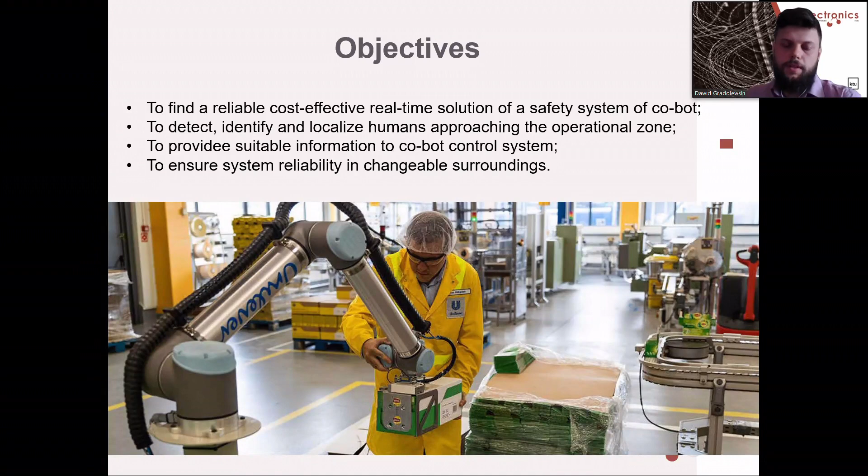Robotization is an efficient and cost-effective approach in modern factories. More and more robots and manipulators are placed in the workplace shared with humans. Such close cooperation between humans and robots may lead to hazard situations, even to human death. The main objective of the thesis was to find a reliable, cost-effective and real-time solution of a safety system of the Cobot to detect, identify, and even localize humans approaching the operational zone of the robot. The system reliability in the changeable surrounding environment without compromising machine productivity is crucial for this research.

In this research, we use user-driven design methodology to define all functionalities and constraints of the system. The design process was systemized, and at each stage, both the stakeholders and the future users were involved. The designed product is mostly dedicated for medium and small sized companies, where price and ease of adjusting the manipulators to other tasks is crucial.

The defined general and itemized functionalities are summarized in this table. We selected 7 crucial functionalities: safety system, object detection, detection classification, object localization, threat classification, Cobot motion control, and interfacing. For all the functionalities, we itemized and gave particular constraints for each of them. For each, we tried to define all the possible technologies and algorithms which can fulfill the requirements, and during the analysis we found the most suitable one.

After the analysis, we came up with a solution, which is an IoT-based distributed computing safety system. The safety system is designed around the IoT concept, where users have easy access to each subsystem through the GUI. All data is stored regarding the previous detections and the system performance in the database. The safety system is composed of sensing detection modules, a decision-making system, and the robot, all of which are connected via the internet. The data processing is decentralized, so the computational overload is reasonable.

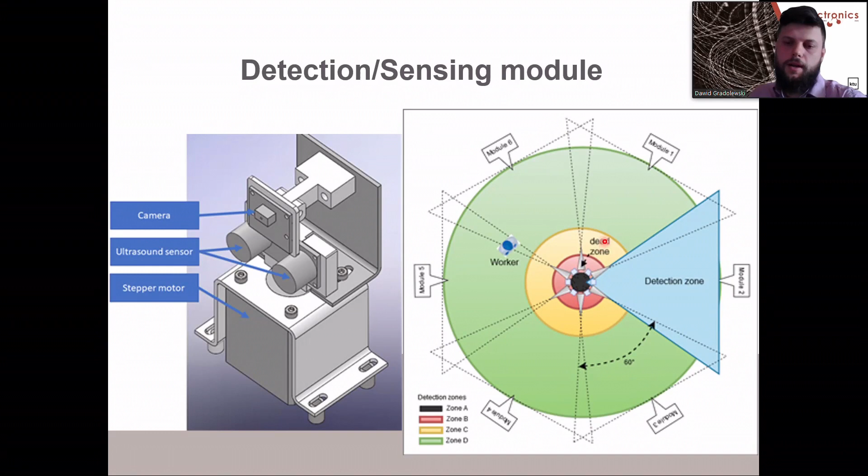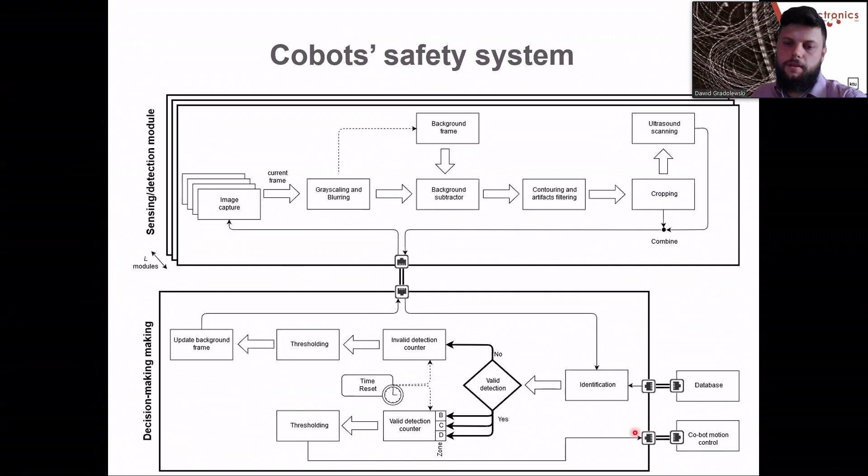The sensing detection module algorithm is based on motion detection. First, the background and current frames are converted into grayscale. Then, to minimize false detection of small patterns in the image, blurring is performed.

On the later stage, the absolute difference between the corresponding pixels is calculated. Next, the differential image is calculated and thresholded to reduce artifacts caused by lights. Then the cropped image is sent to the identification process.

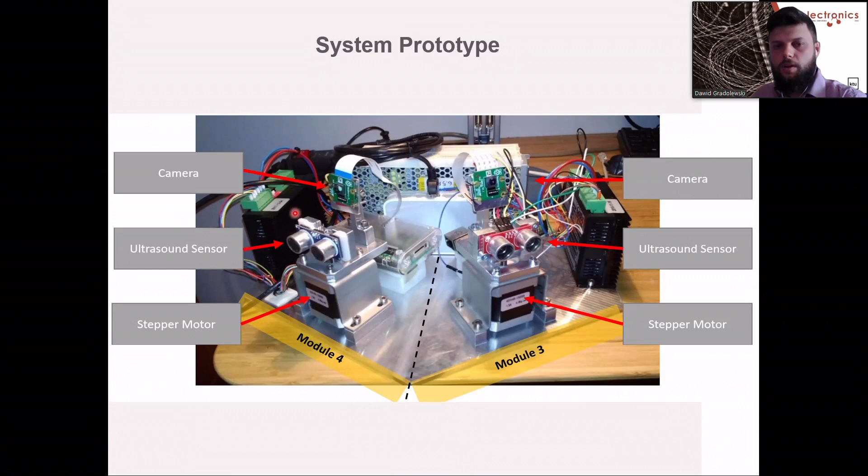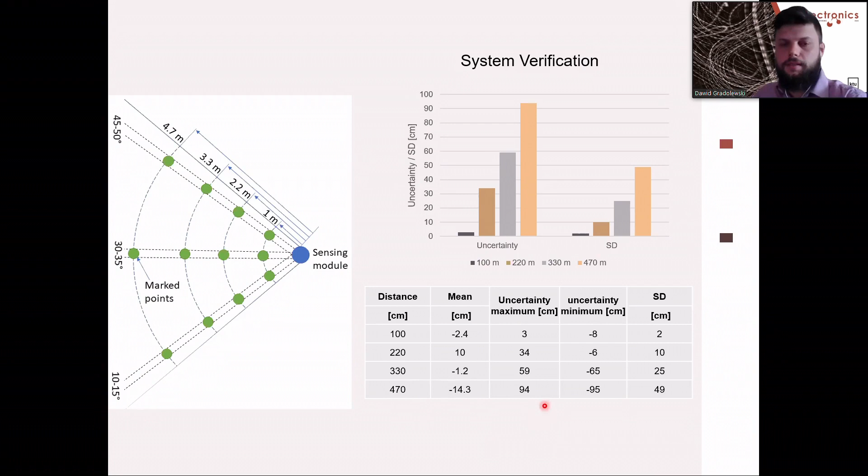This research shows the capacity of developing the most reliable real-time safety system for the Cobot, which is able to detect and localize human multi-objects approaching the Cobot's operational zone, and then provide a decision about a suitable action for the Cobot's control.

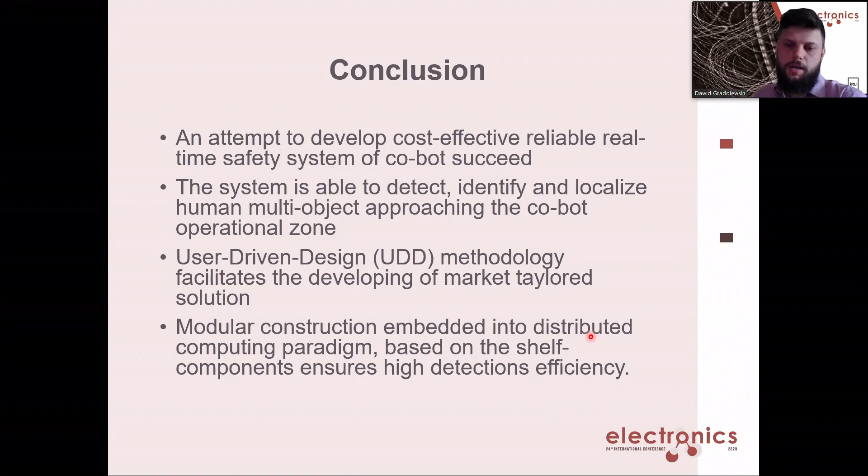The systematic design approach of the user-driven design methodology facilitates the development of the system, which meets all requirements and constraints defined by future users and stakeholders. The modular construction, embedded into a distributed computing paradigm basing on shelf-components, ensures high detection efficiency and low costs of the system. Thank you for your attention.

Okay, thank you, David, for a nice presentation. This is a little bit complicated now, maybe with the questions, but I think all the presenters may have a question. If you have a question, just open your microphone and state your question.

And the audience watching us on YouTube, please type your question. There is a chat bar at the top where you can type your questions. I see that we have some small delay between the presentation on Zoom and on YouTube, but I think David can also answer, and I can read the question to him.

So David, waiting for the others, I have to take my opportunity to ask you the question. You showed the lighter side of your project, everything that was successful. What was the drawback of your project? What is the drawback of your solution, if you may find it? Maybe not the drawback, but maybe the future work.

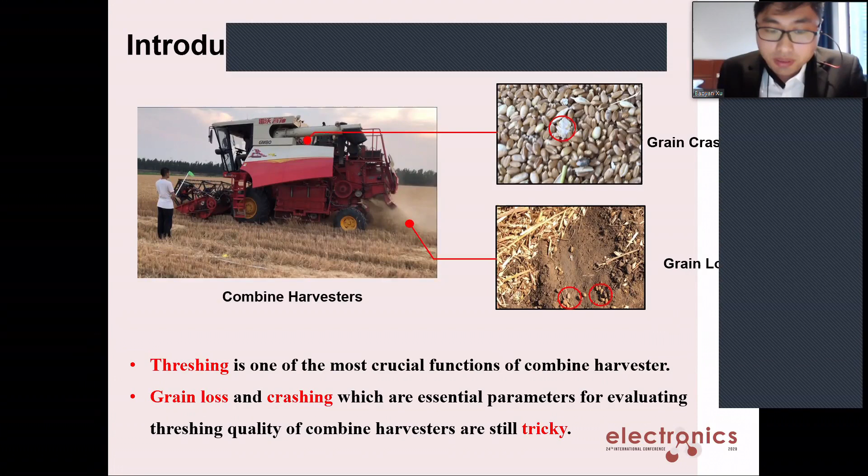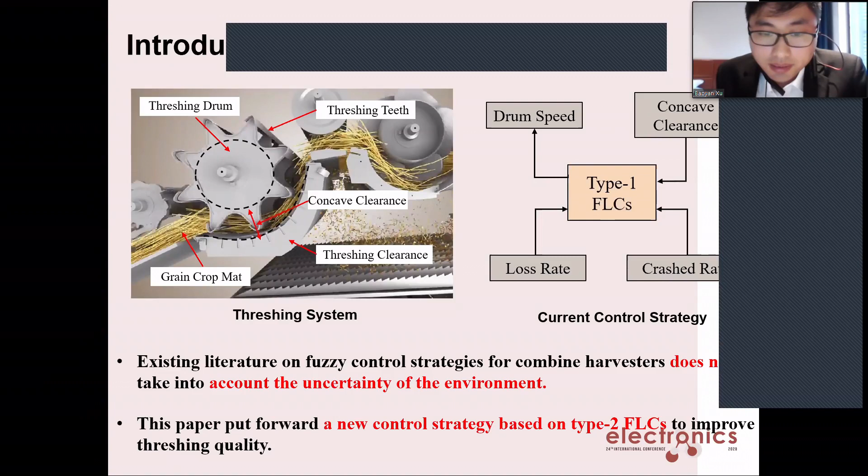But it should be pointed out that existing literature on fuzzy control strategies does not take into account the uncertainty of environment. Consequently, it is not reasonable to use an accurate membership function for measurement data without considering fluctuations and disturbances. Therefore, we proposed a new control strategy based on type 2 fuzzy logic controllers to improve threshing quality.

The control strategy based on the fuzzy idea must obtain the relationship between parameters. Therefore, in order to obtain the relationship between concave clearance, drum speed, loss rate, and crashing rate, a basic data acquisition test is designed.

The detection part of the threshing separation quality system installed on the combine harvester mainly consists of 6 parts: crashing rate node, drum speed node, grain loss rate, grain loss node, concave clearance node, data acquisition terminal, and computer.

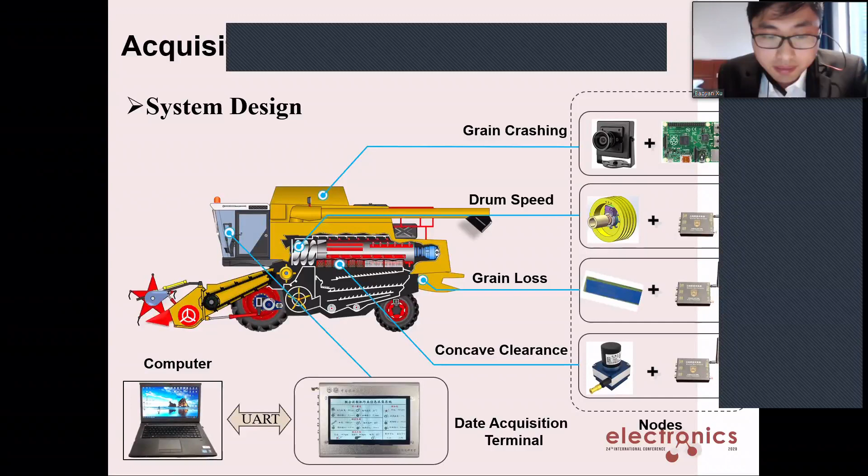The field harvesting experiments were conducted at Beijing Xiaotangshan. According to the national standard equipment for harvesting combine harvesters test procedure, the concave clearance was adjusted to 10 millimeters, 15 millimeters, and 20 millimeters, and the test results are shown in the picture.

And 2 rules can be obtained from the result. The first one: when the concave clearance is 10 millimeters, 15 millimeters, and 20 millimeters respectively, the grain crashing rate first increases and then decreases. The other one: when the concave clearance is 10 millimeters and 15 millimeters, the grain loss rate decreases with the increase of drum speed.

But when the concave clearance is 20 millimeters, the grain loss rate decreases first and then increases.

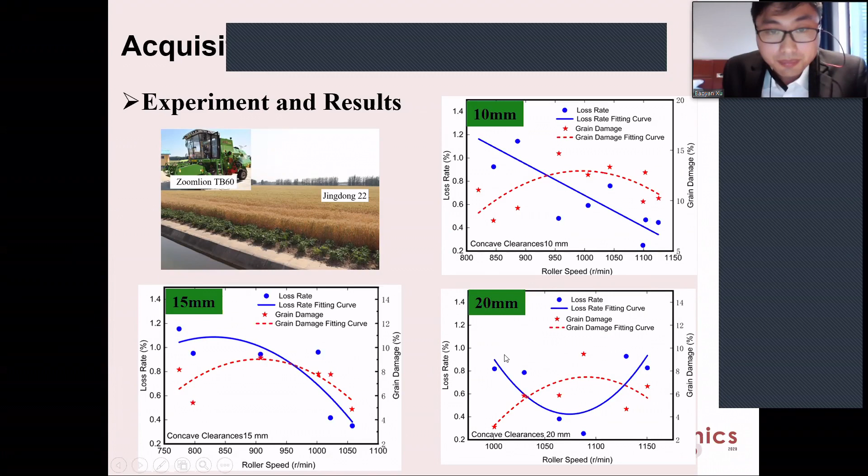In order to improve threshing quality, two control strategies were designed based on experimental data. One is low grain loss rate, and the other is low grain crashing rate.

In the low grain loss rate control strategy, input variables are loss rate and concave clearance, and the output variable is drum speed. In the low grain damage rate control strategy, input variables are grain crashing rate and concave clearance, and the output variable is drum speed.

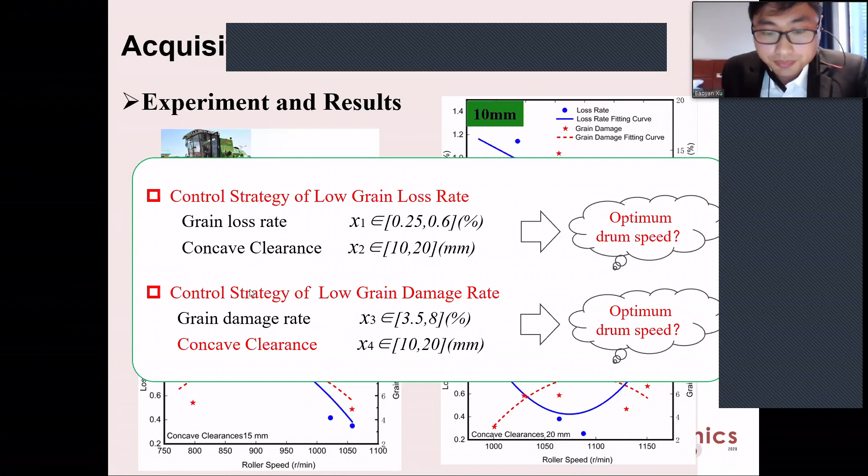Before designing the control strategy, let me briefly introduce the type 2 fuzzy logic controller. In the Cartesian coordinate system, the type 2 fuzzy sets can be expressed as a two-dimension region, which is called the footprint of uncertainty.

It's the union of all primary memberships. The upper membership functions and the lower membership functions are the boundary of the footprint of uncertainty, and can be expressed as type 1 fuzzy sets.

In the low grain crashing control strategy, one input set is damage rate. Damage rate is defined by three membership functions: ND, MD, and LD. Another input set is concave clearance.

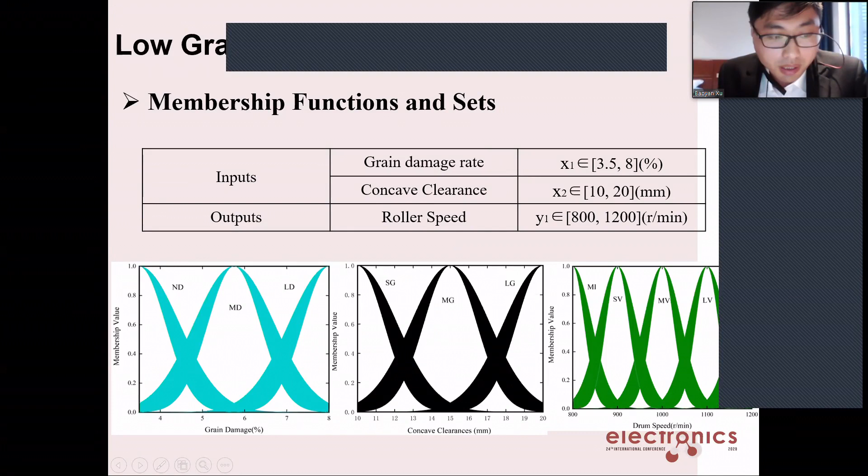Clearance is defined by three type 2 fuzzy Gaussian membership functions: SG, MG, LG, in the interval 10 to 20. The output set, linear velocity of the threshing roller, consists of 5 membership functions: MI, SV, MV, LV, MA, in the interval 800 to 1200. Characteristics of the inputs and output of the grain damage type 2 fuzzy logic controller are recorded in detail in the table.

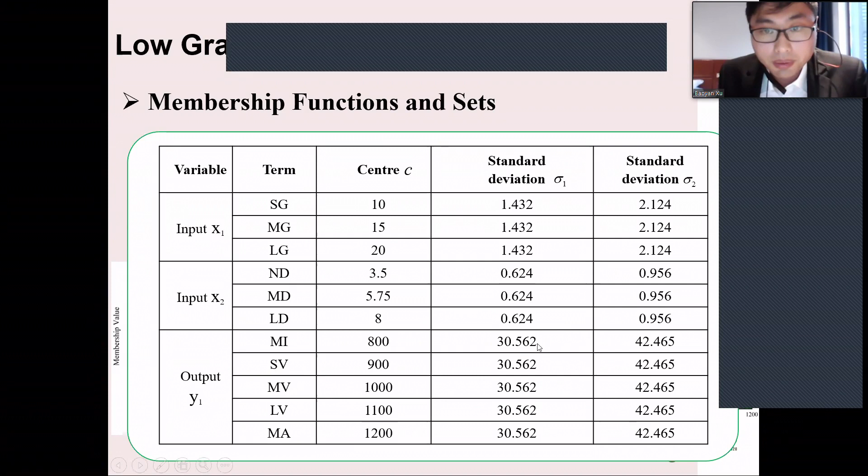According to experiment data, 9 rules of the grain crashing fuzzy logic controller are established.

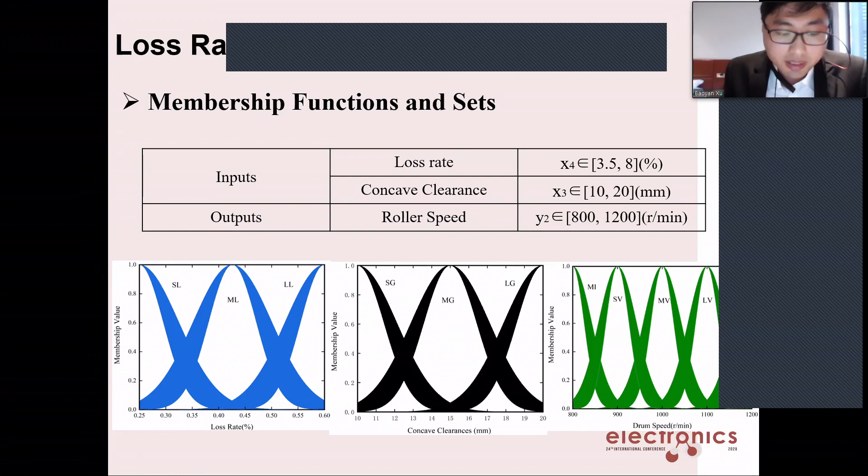Similar to the grain crashing control strategy, in the loss rate fuzzy logic controller, the loss rate set is defined by 3 membership functions: SL, ML, and LL, in the interval 0.25 to 0.6. The concave clearance and roller speed sets are equal to the grain damage control strategy respectively. Similarly, 9 rules are designed according to the experiment data.

In order to test the controller, grain damage and loss rate type 1 fuzzy logic controllers are designed and compared with type 2 fuzzy logic controllers using the fuzzy toolbox from MATLAB. Moreover, to evaluate the response of the strategy, integral of square error and integral of absolute error are used in this section.

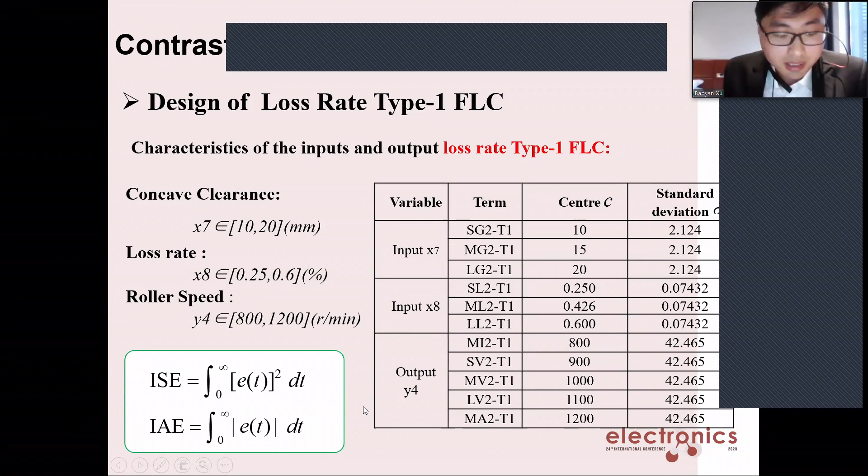Type 1 fuzzy logic controllers and type 2 fuzzy logic controllers of grain damage are built in the fuzzy inference editor in MATLAB. When the value of concave clearance are 10 millimeters, 15 millimeters, and 20 millimeters respectively, there is always an error between the outputs of the fuzzy logic controllers and the fitting curve, on account of the open loop system. However, their trends are consistent, as can be seen.

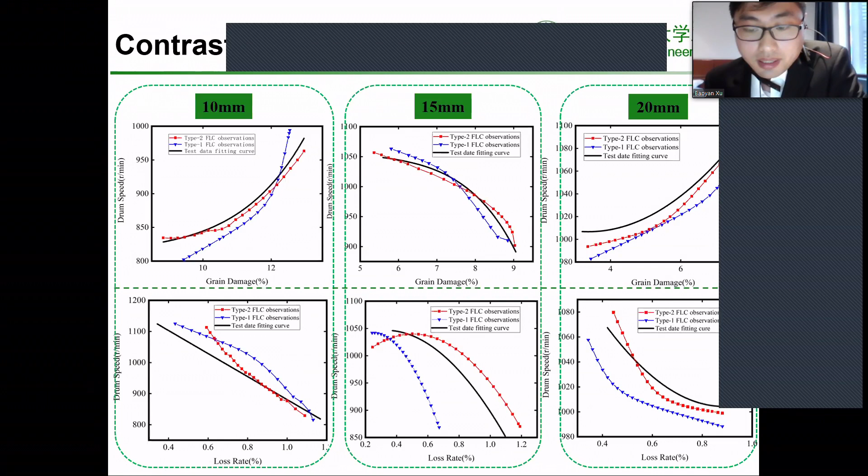Integral of square error and integral of absolute error of the type 2 fuzzy logic controller are less than type 1's. Those values indicate that the type 2 fuzzy logic controller performs better than type 1.

In order to verify the effectiveness of the control strategy, controlled and uncontrolled experiments are designed. In field experiments, the loading speed of the roller is calculated based on the control, and the roller speed is set as the calculated value.

From the experiment results, it can be seen that the damage rate and loss rate of the control experiment are reduced to a certain extent. When the concave clearance is 10 millimeters and the speed of the roller is 900 RPM, the loss rate and damage rate decrease the most, with amplitudes of 44.6% and 25.26% respectively.

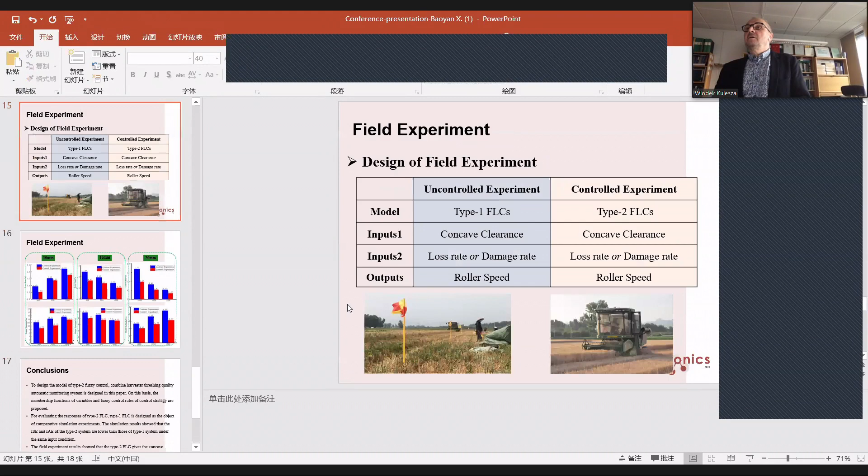Do you see we have some problem, you cover your picture with some gray box? I don't know what this is, you see? We had this problem all the time. There are still some gray squares on the top and on the right hand side of your screen. I don't know where it is from, but it is some problem. Maybe fuzzy logic is needed to get rid of this. Do you see this on your screen?

My English expression is not very good. No problem, no problem. Continue, okay, yes. So what is your motivation, please?

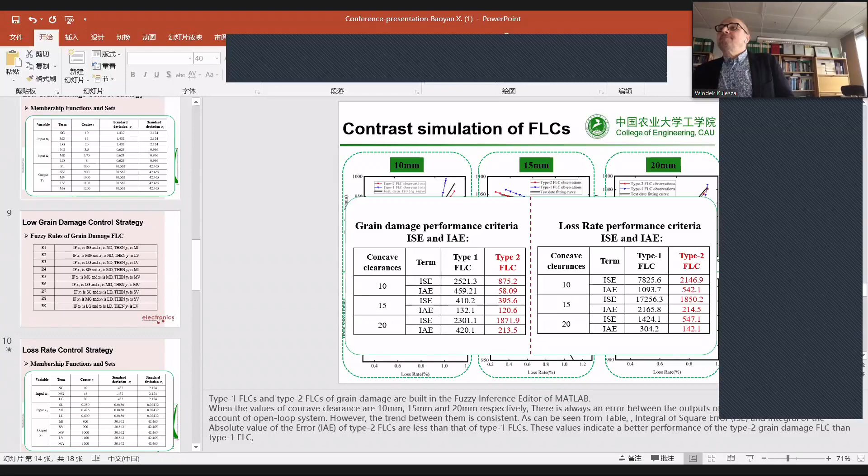Because agricultural control is not precision control, so I chose the fuzzy logic control.

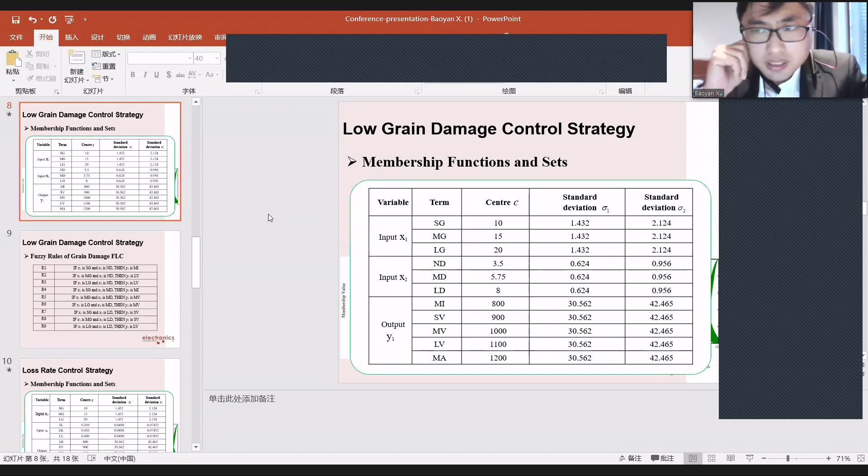Okay, when you come to your conclusions, please, on the last, next to the last slide, you said that you grain damage rates and maximum decrease in losses. What do you compare it with? Do you compare it with this type one, or what is the reference to this gain that you got? To a regular controller, or to which kind of controller did you apply this reduction and decrease and so on? We need to know what is the reference point of your result.

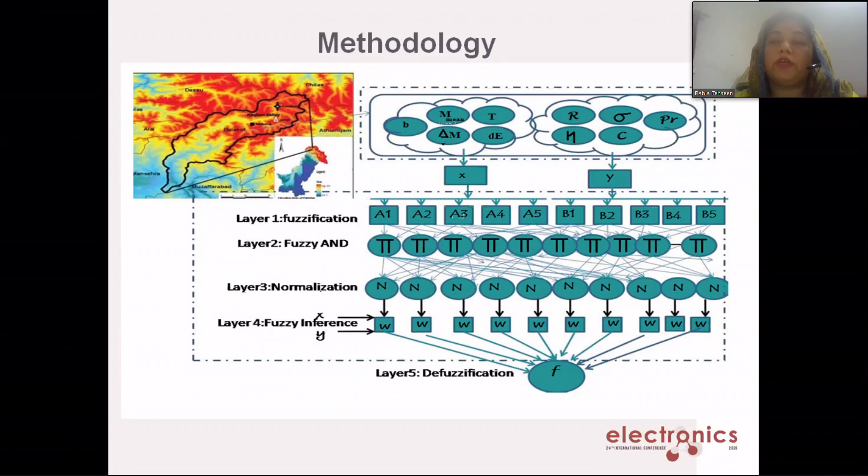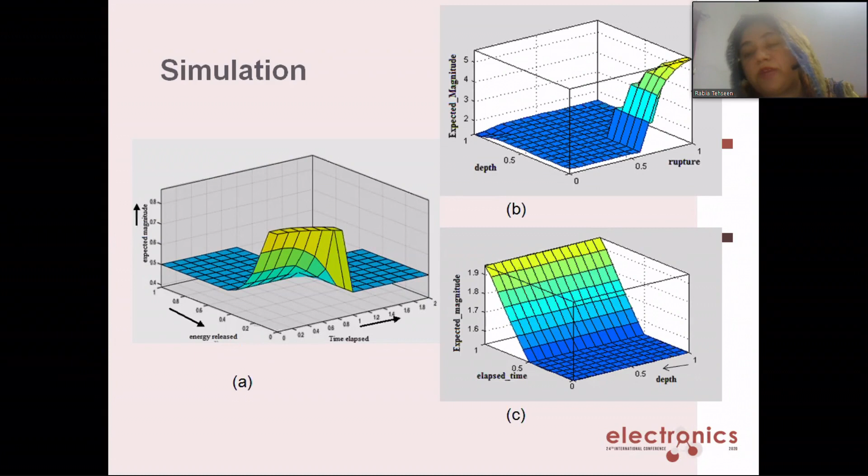We have implemented and simulated it in MATLAB. These are the results of our method.

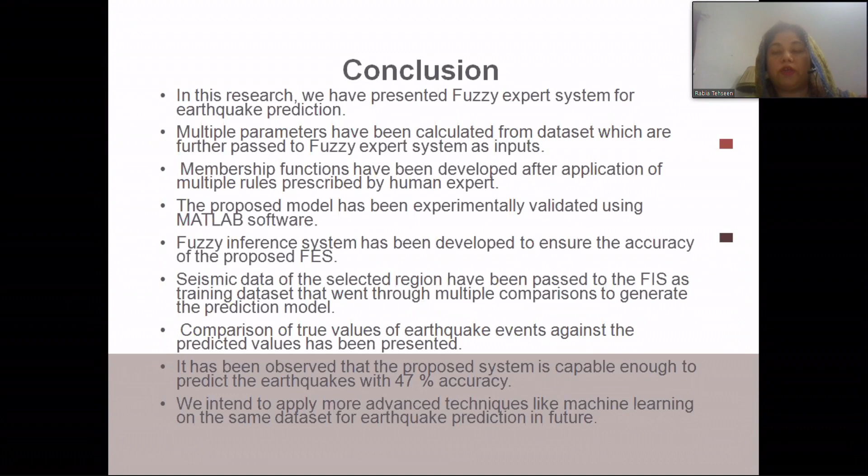Conclusion. In this research, we have presented a fuzzy expert system for earthquake prediction. We extracted multiple parameters from the data set that have been passed to the fuzzy expert system as input. Multiple rules and membership functions described by human experts have been applied. We validated the data using MATLAB and generated the model. The model has given us 47% accuracy. In future, we intend to apply machine learning on the same data set to improve our accuracy, so that we may gain 60% or 70% accuracy.

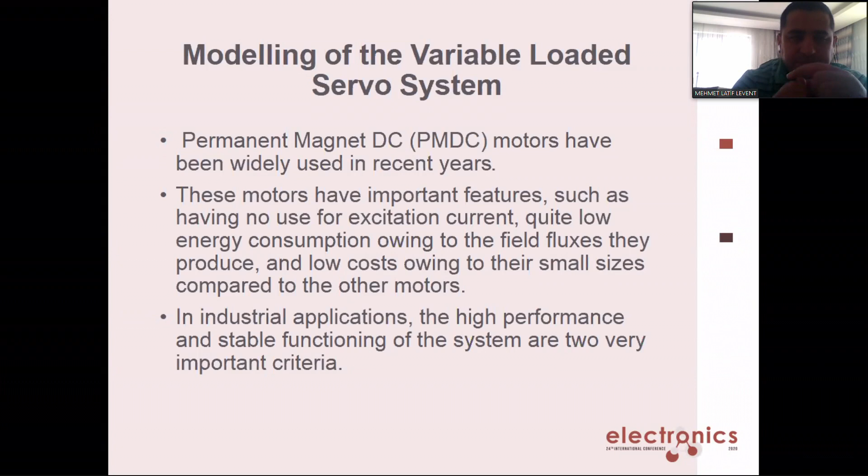Now I am going to show state estimation. Accurately estimating all the unmeasurable states of the system is an important factor that influences the functioning of the plant in high performance and stability.

There are two important methods in state estimation, called observer and Kalman filter. In this study, we used reduced order observer. The full order observer method is applied to estimate all the states in the controller designs, and the reduced order observer method is applied to estimate unmeasurable states.

This control structure is used in particular induction motor control, sensorless electric drives, permanent magnet synchronous motors, linear time delay systems, aircraft motion control, and multi-agent systems. Reduced order observer structures are commonly used for system design that provide ease of operation by reducing the degree of the observer.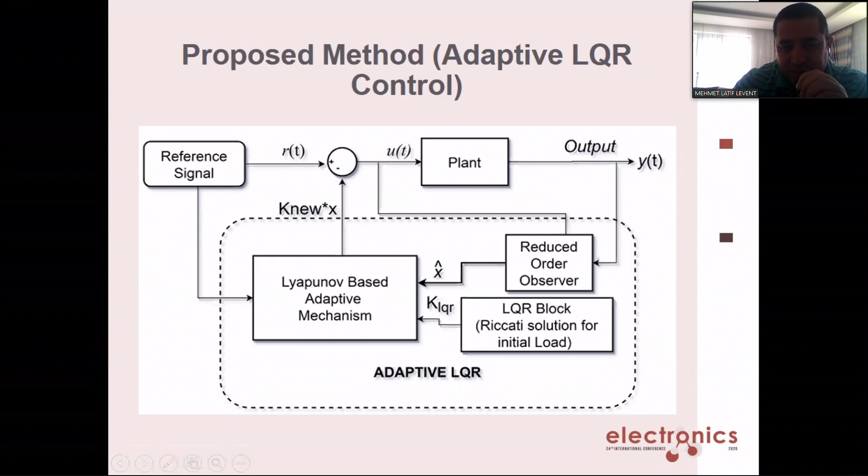We can see the Lyapunov-based adaptive mechanism as a new approach. This figure shows the block diagram of the Lyapunov-based adaptation mechanism as seen in the previous section.

Lyapunov-based adaptive mechanism, and the reference signal states that are estimated by the reduced order observer: x1, x2, x3 reference signal, and linear quadratic regulator output. We can see A1, A2, A3.

These parameters are defined as inputs in this related block. In this system, different adaptation blocks for the states—position, speed, and current x1, x2, x3—are designed. The first block provides position control; we can see the first adaptive Lyapunov stability criterion is for position control. The second block provides speed control, and the third block provides adaptation for the current control.

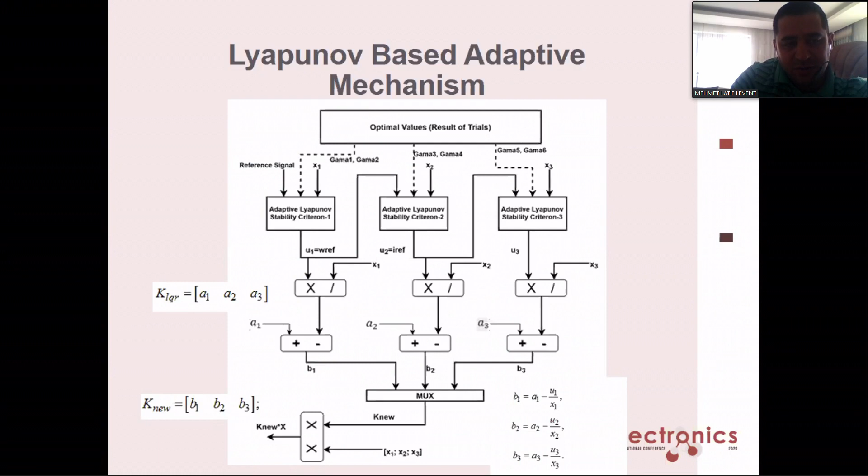In the last part, I would like to give simulation results and conclusion. When adaptive linear quadratic regulator and reduced order observer with linear quadratic regulator control methods are applied in the system, the results for the unvarying system are shown in this figure.

We can see the red line is the reference signal, the black line is the reduced order observer with linear quadratic regulator, and the blue one is the adaptive linear quadratic regulator.

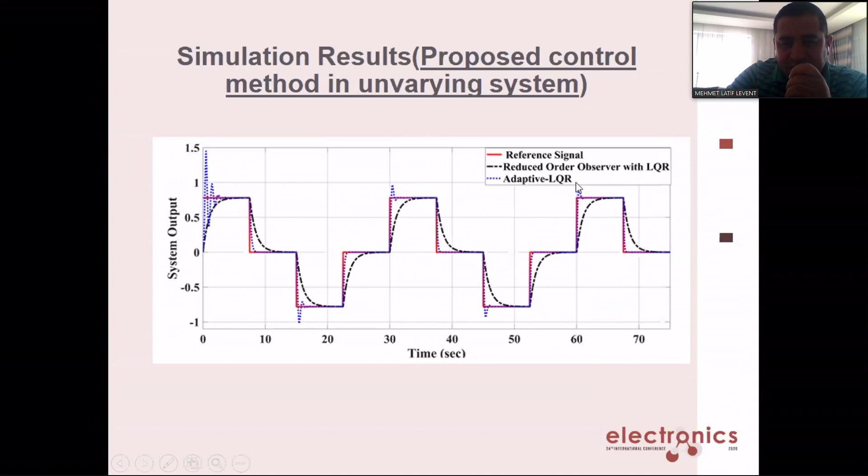Examining the error change shown in this figure, it is concluded that the position output signal rapidly catches the reference signal, as is shown in table 2. Comparing the results based on their performance measurements, it is understood that the proposed system produced better results and has high performance.

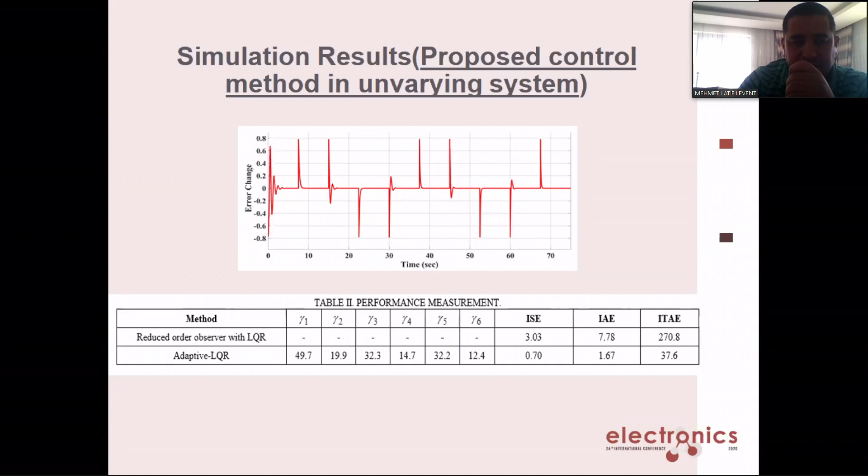The response of adaptive linear quadratic regulator and other control methods are given in this figure, and effects of the variable load that occurred after 21 seconds on the response curve of the system is shown in the second figure clearly.

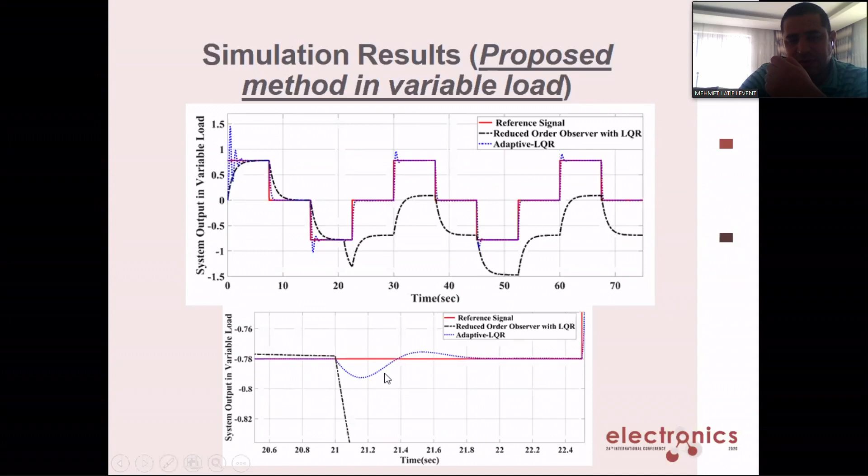We can see proposed methods catch the reference rapidly.

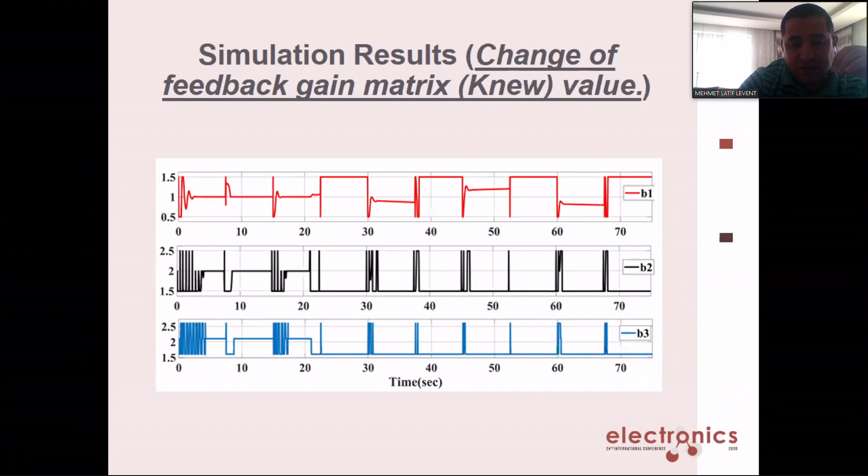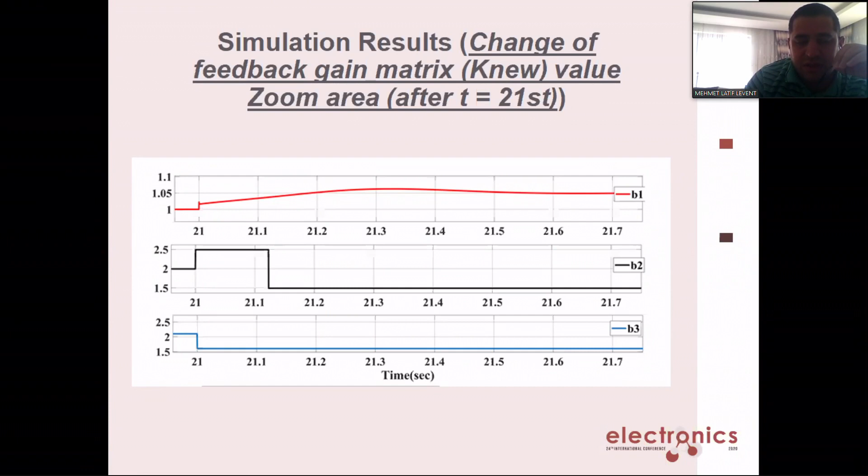Also, change of the feedback gain matrix value is given in this figure. Here it is observed that the gain matrix value changes in accordance with the environmental condition and rapidly minimizes the load effect, and we can zoom error after the 21 seconds and gain matrix value change in accordance with the environmental condition and rapidly minimize the load effect.

Conclusion: the designed new control system with a linear quadratic regulator and reduced order observer is based on adaptive state feedback control that compensates the disruptive effects such as variable load and increases the system performance.

This controller structure was successfully used in trajectory control of a servo system that can change the load over time in simulation. As is known, it is not possible to completely remove the disruptive effects. The system can estimate the states of the variable loaded servo system, thus the disruptive effects can be minimized.

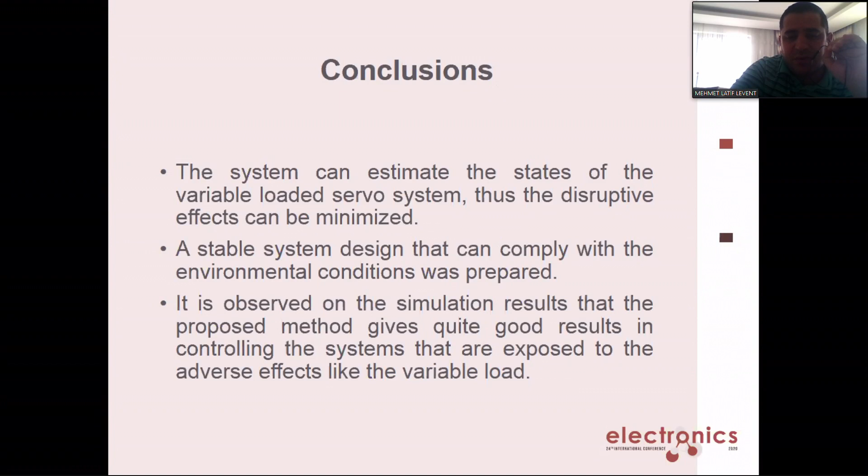A stable system design that can comply with the environmental condition was prepared. It is observed in the simulation results that the proposed control method gives quite good results in controlling the system that is exposed to adverse effects like the variable load.

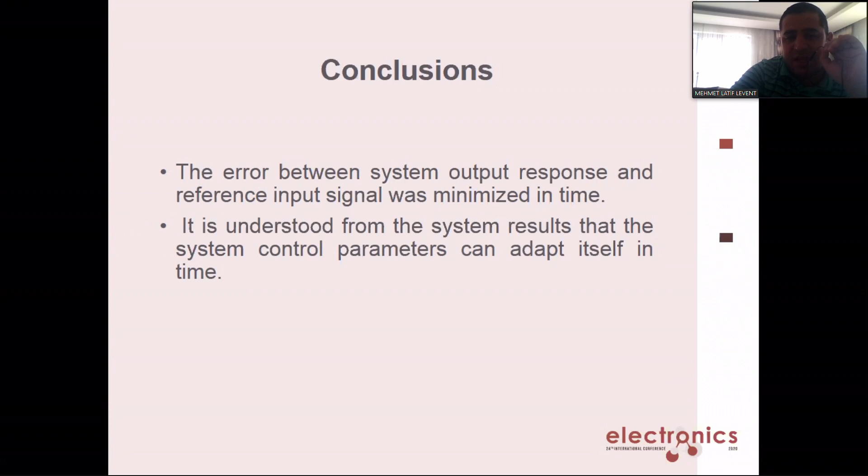The error between system output response and reference input signal was minimized in time. It is understood from the system results that the system control parameters can adapt itself in time. Thank you.

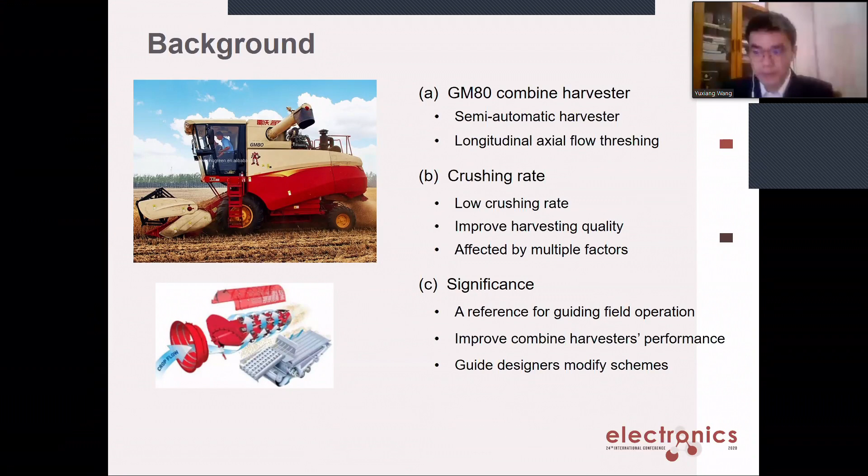In order to ensure harvesting quality and efficiency, the operator will frequently adjust speed, stubble height, and other operating parameters of the harvester based on their experience. It requires vast experience of field harvesting and high labor intensity. Meanwhile, it's difficult for combine harvesters to keep the best working performance all the time. Therefore, identifying the effective intensity of each factor and obtaining the best combination will have great meaning for actual production. For example, our research could provide a reference for guiding field operation, aiming at improving combine harvester performance while reducing labor intensity. Also, the result of our research may guide designers to modify their next generation combine harvesters.

Our objective in this paper is to identify the complex factors affecting crushing rate. A mathematical model of the crushing rate was established through four-factor, three-level field experiments in this paper. The optimal operation parameters of combine harvesters were identified through range and variance analysis.

Next, I will analyze various factors affecting the crushing rate in detail. First, let's look at the feed rate. The feed rate reflects the performance of the harvester. In general, a larger feed rate means stronger handling capacity and higher working efficiency. Multiple factors, such as the density of grain and the cutting range, will affect feed rates.

In our experiment, we made some assumptions in order to control some variables. The density of grain had small changes within the same group of experiments because the crops grew uniformly. In our experiment, the cutting range didn't change because we always did full harvest. At the same time, during harvesting, cutter height was maintained at a defined height, so the stubble height was almost the same. The only adjustable variable is operation speed, which can be easily controlled by drivers. In our experiment, we set 3 levels for operation speed: 4, 6, and 8 kilometers per hour.

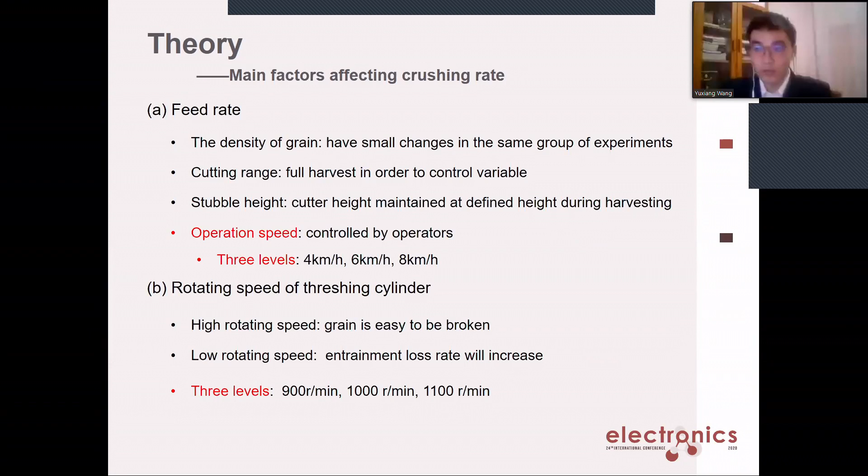The third affecting factor is the moisture content of the grain. If the moisture content is high, low hardness and poor impact resistance will lead to high crushing rate. But if the grain is too dry, poor toughness, low strength and poor impact resistance will bring more broken grain.

In this paper, experiments were carried out in the morning, noon, and early evening. The 3 levels of grain moisture content were 15.1%, 13.26%, and 14.4%. The last affecting factor we studied is concave clearance.

According to relevant research, when the gap between concave plates increases, it is beneficial to the flow of crops and penetration of grains through the crop layer. Thus, crushing rate and entrainment loss will decrease. According to operators' experience, 3 levels of concave plate gaps were selected to match the threshing cylinder speed: 10, 15, and 20 millimeters.

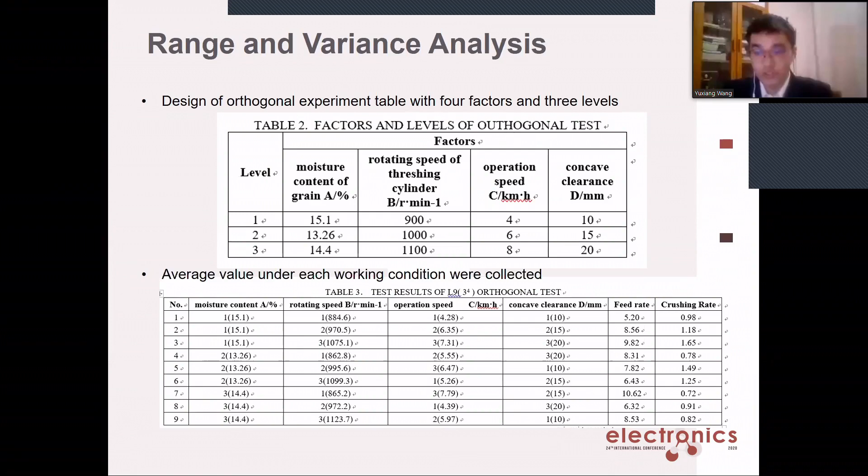In order to determine the influence degree of each factor on the crushing rate, we did range analysis. As Table 4 shows, the value of R was calculated. The larger the value is, the greater the influence of this factor on the crushing rate. So we could see the moisture content of grain and the rotating speed of threshing cylinder have almost the same significant impact on the crushing rate. Then followed by operation speed, which reflects feed rate. And the concave clearance has less impact on the crushing rate.

At the same time, variance analysis also confirms this result. According to the result of range analysis, we could determine the optimal scheme. For factor A, we choose level 3, which has the smallest value of Ki. So the optimal scheme determined with the same method is A3, B1, C2, D2.

In other words, the moisture content of grain is 14.4%, and the rotating speed of threshing cylinder is 900 revolutions per minute. Operation speed is 6 kilometers per hour, and the concave clearance is 15 millimeters. The performance of combine harvesters will be better when GM80 runs in this condition.

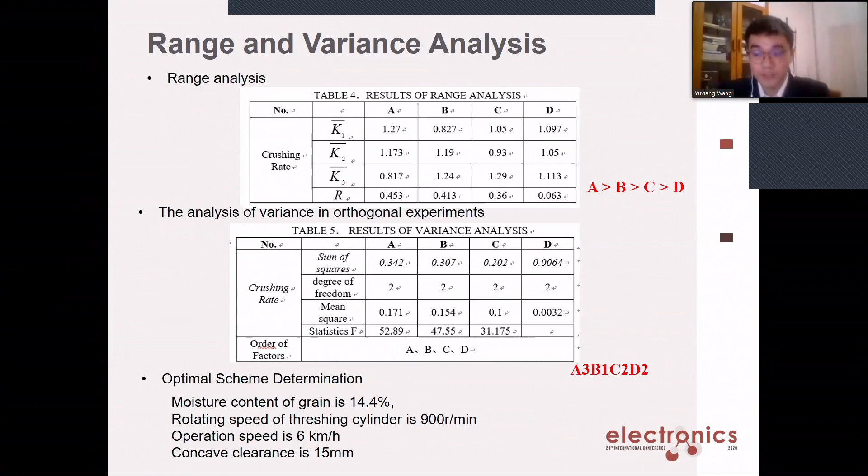In order to quantitatively analyze the relationship between those parameters and the crushing rate, the multiple regression method is used to establish the crushing rate model. Since the grain moisture content has a great influence on the crushing rate, the crushing rate and the threshing cylinder rotating speed are fitted separately under the same moisture content. After removing the abnormal data, the fitting results are as shown in this figure. Table 6 shows the regression equation of threshing cylinder rotating speed and the crushing rate.

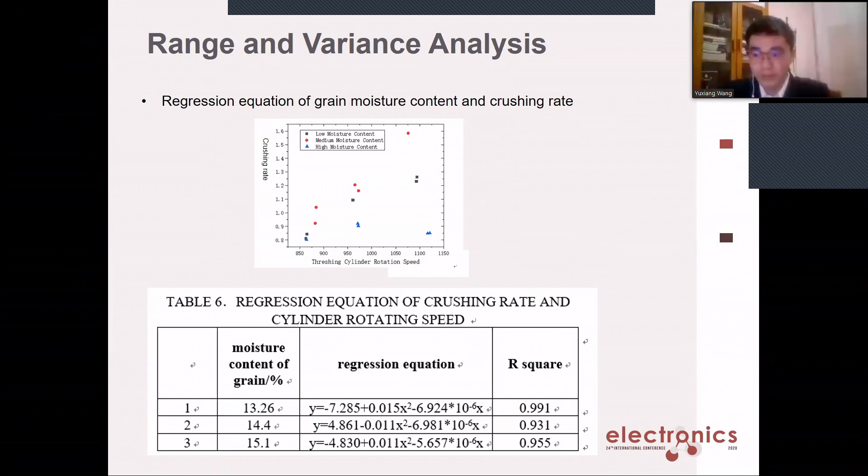The last part is the conclusion and the expectation. Through this experiment, we can determine the optimal control parameters for the GM80 combine harvester, and we think that orthogonal experiments with more levels could be designed to explore more exact mathematical models. Meanwhile, every year we will continuously collect data to establish a prediction model to estimate yield. Also, through our research, we believe that we will promote the development of combine harvesters in China.

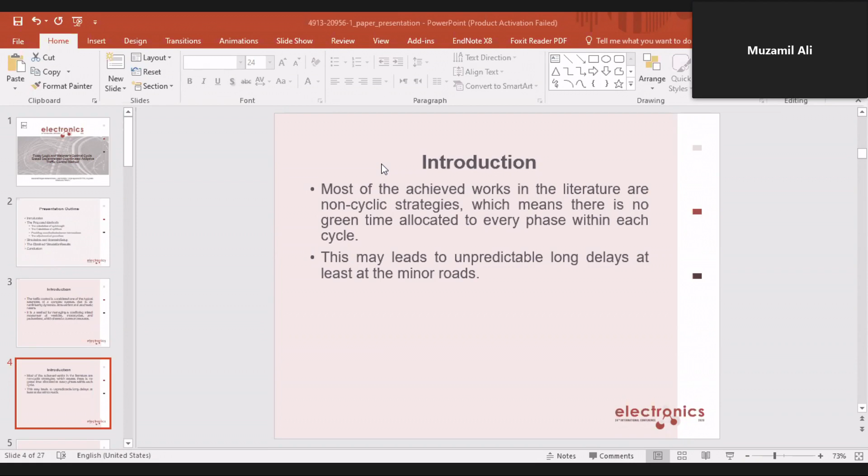Can you hear me now? Yeah, I hear you, but I don't see your face. So please open your camera as well. I'm trying to open my camera, but I don't have permission. No, you may have it, allow it. You cannot stop the video because... Okay, oh now okay, we see you. We have seen you before because you appeared for a while on the screen and so on. So you know, we are a little bit short in time, so I hope that you will manage it in the required time. Okay, good luck, I hope that.

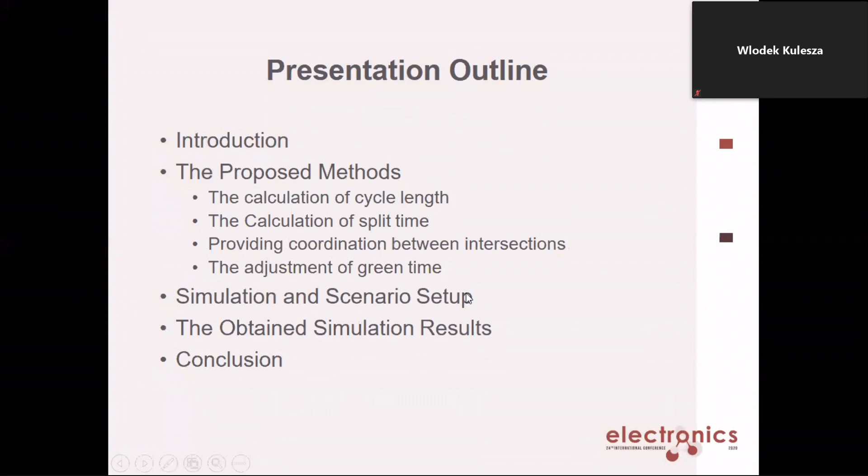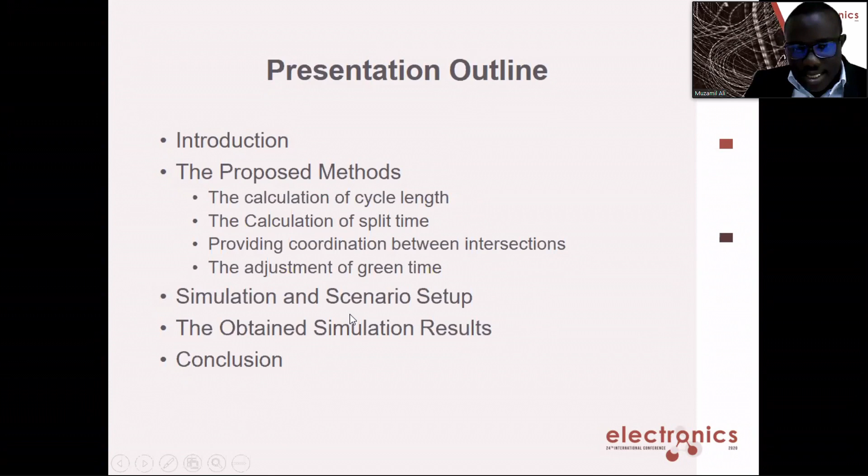I will first introduce the traffic control system and its importance, and then move to the proposed methods, including how we calculate the cycle time split, provide coordination between intersections, and adjust the green time. Then we discuss the simulation and scenario setup, and conclude with the obtained results and conclusion.

Traffic control is considered one of the typical complex systems due to its non-linearity, stochastic nature, time variance, and so on. It is a method for managing conflicting mixed movement of vehicles and motorcycles that use shared infrastructure.

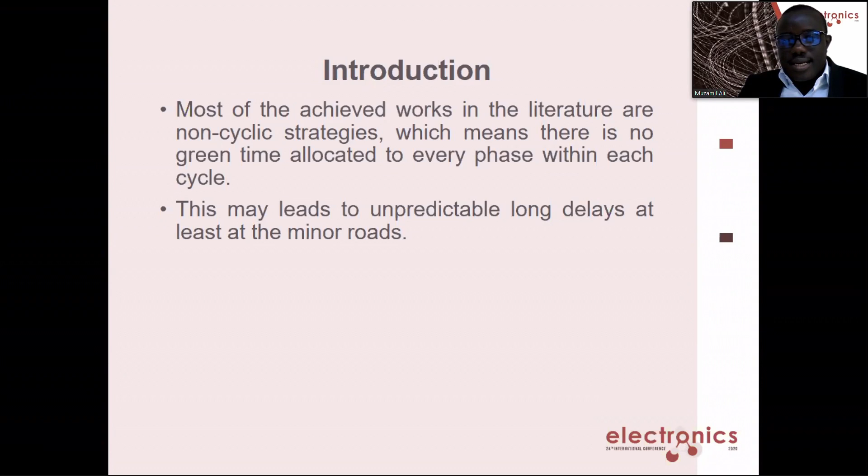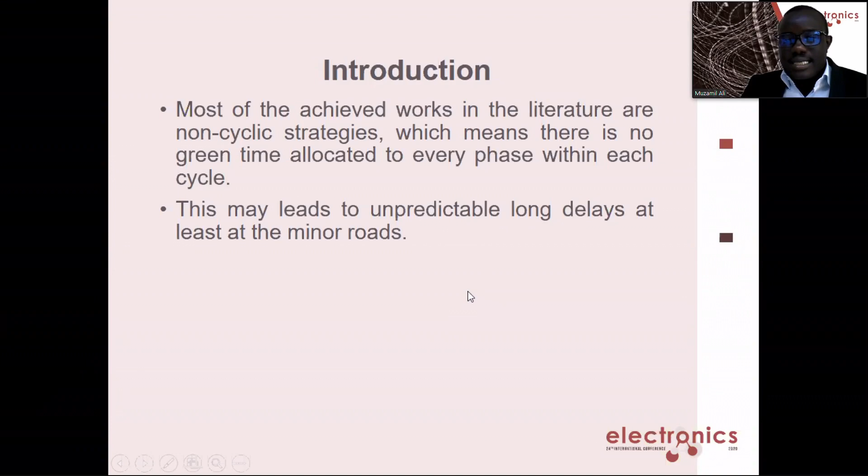There is a lot of work done in the literature, but most of it now uses a non-cyclic strategy. That means there is no green time allocated to every phase within each cycle. This can lead to unpredictable long delays, at least on the side road.

To overcome this drawback, we propose a cyclic method that assigns a green signal for all phases during each cycle. To do this, we use Webster's method to calculate the optimal cycle, and then use fuzzy logic to monitor the traffic situation.

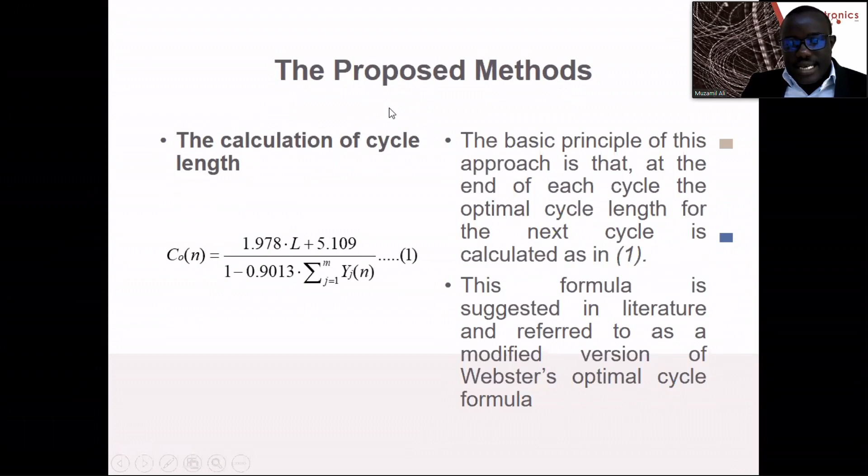For calculation of the cycle, we use a modified Webster version that depends on the critical lane flow, which is represented by Y here.

Then we split the calculated cycle time to each phase using this equation: the optimal cycle minus lost time minus the dedicated minimum green time of each phase, multiplied by the number of phases. Here we calculate the portion of the green time, and finally the total green time that applies for each phase.

How can we provide coordination between intersections? We propose two modes of phases. We can select one mode at each time or at each cycle, mode 1 or mode 2.

Mode 1 consists of phase 1, phase 2, phase 3, and phase 4. Mode 2 consists of phase 2, 3, and 4 the same, and for phase 5 and 6 for the arterial. For the arterial, we use this combination of phases.

The problem is dedicated as a combination problem. For this reason, we use two modes, and the combination of these two modes gives 48 combinations. There is a restriction.

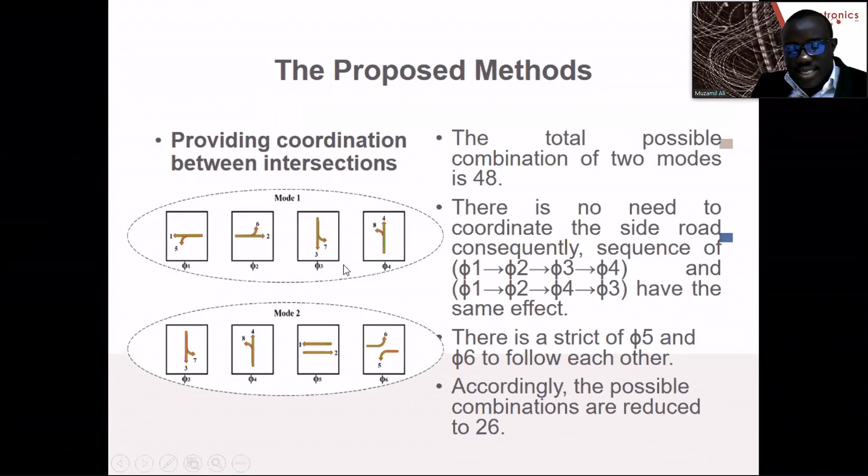For example, there is no problem if we use phase 1, phase 2, followed by phase 3, phase 4, or followed by phase 4 then phase 3, because phase 3 and 4 are not coordinated phases for our proposed arterial. Here, at the beginning of each cycle, we calculate the distance or time difference between each combination of phases.

This time difference can be calculated using P and V. P is the phase difference, the remaining time of the phase, and D is the remaining time of the next phase to be green, while V is the remaining time for the head vehicle departing from the neighboring intersection to reach the stop line of that phase.

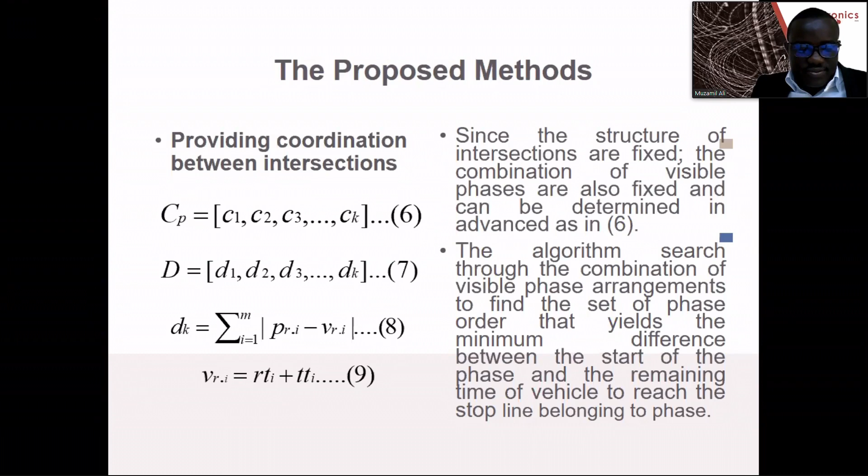Here we check the green time of the current phase. If it's 0, this means the phase is finished or not. If the phase is not finished, we continue. If the phase is finished, we check whether the cycle time is finished.

If there is a new cycle, we use modified Webster to calculate it, then calculate the split and reorder the phases to coordinate the arterial road.

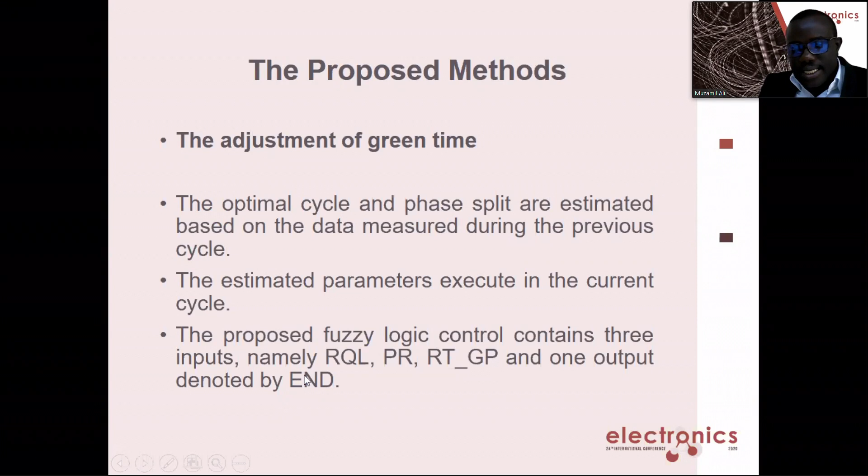Here we use fuzzy logic that contains 3 inputs and 1 output. The 3 inputs are named remaining queue length, passing rate, and remaining time of the current green phase. The 1 output is denoted by extend, no change, and decrease.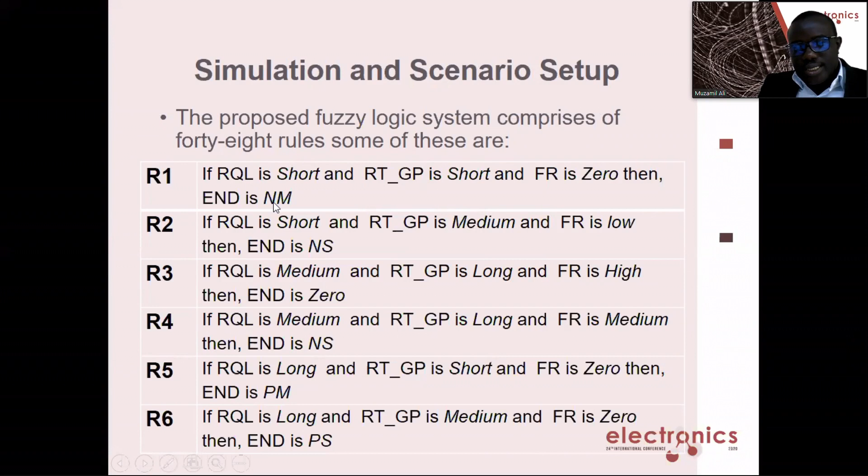This is a sample of a proposed fuzzy rule. For example, if the remaining queue length is short and the remaining time of the current green phase is short, and the passing rate is 0, then the extend/no-change/decrease output is negative max. Negative max means there are few cars and it is far from the stop line, so we need to decrease the current green time by the maximum negative number.

This is our proposed arterial, which consists of 2 intersections, intersection A and intersection B. These characters represent the flow of the main direction of the arterial. F1 and F4 is the main flow of the main direction of the arterial.

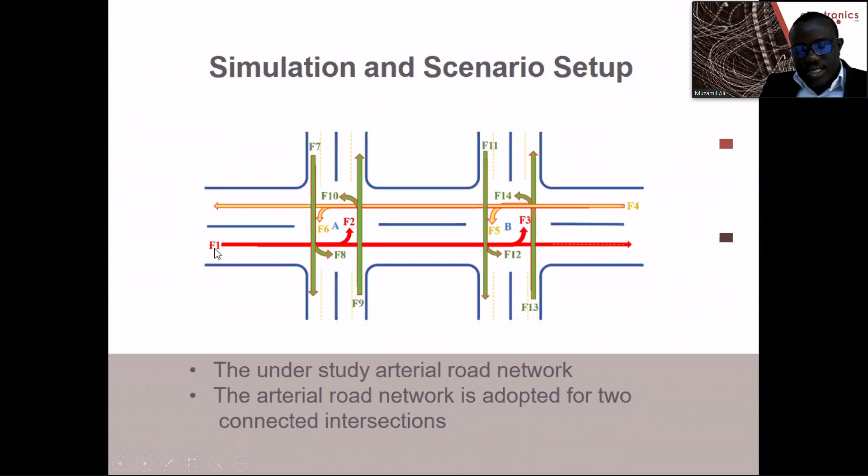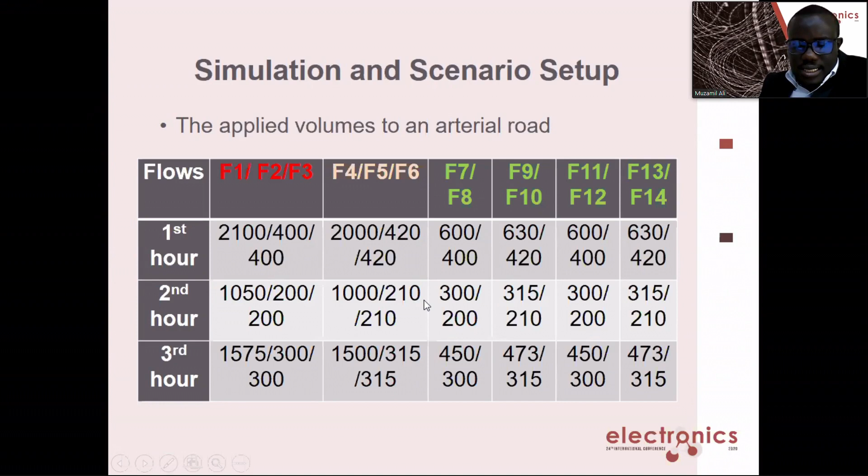Here we use the maximum vehicle speed is 50 km/h. Lost time is 3 seconds. The travel time between the 2 intersections A and B is set to be 32. This is corresponding to the link between two intersections, that is 400 meters with 50 kilometers per hour.

For the back pressure, we use capacity-aware back pressure. For this reason, we use the capacity of the road. We use the default value of 5 meters for a vehicle and 2.5 meters of the headway gap between two vehicles. Using this, we calculate the capacity of each road.

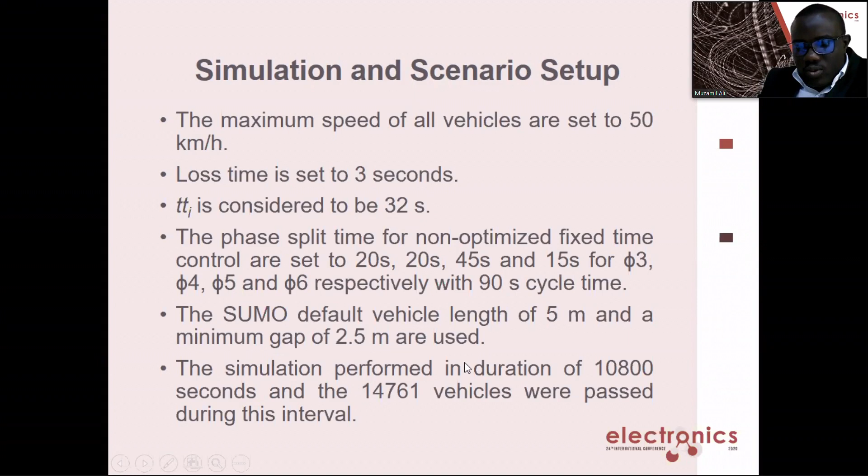We performed the 3-hour simulation. During this simulation, 14,761 vehicles passed during this interval.

The obtained simulation result, we use the 4 performance measurement index for fixed time, cyclic back pressure, isolated fuzzy logic base, and coordinated fuzzy logic base.

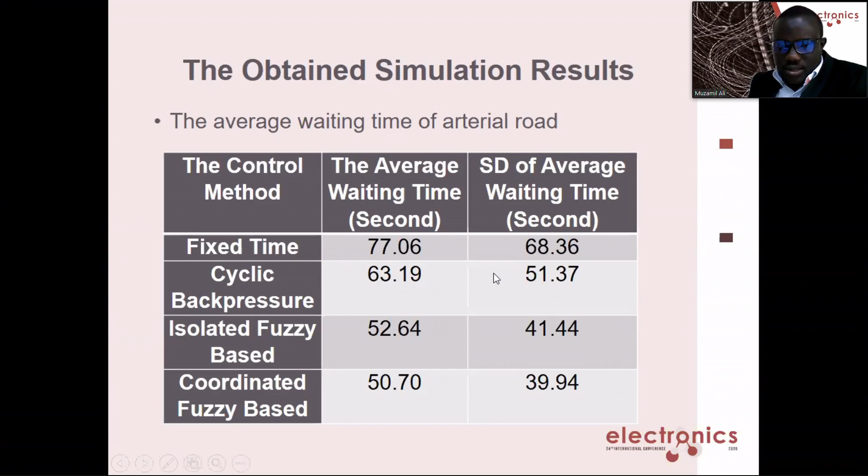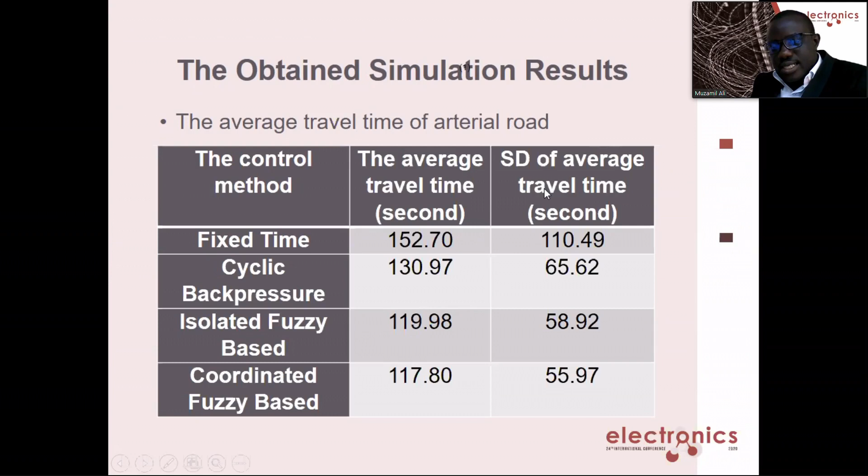From the waiting time, we obtain 77.06 for fixed time, while for coordinated we obtain 50.70 seconds, with a standard deviation corresponding to each method. For travel time, we obtain for fixed time with its fuzzy value, with its standard deviation.

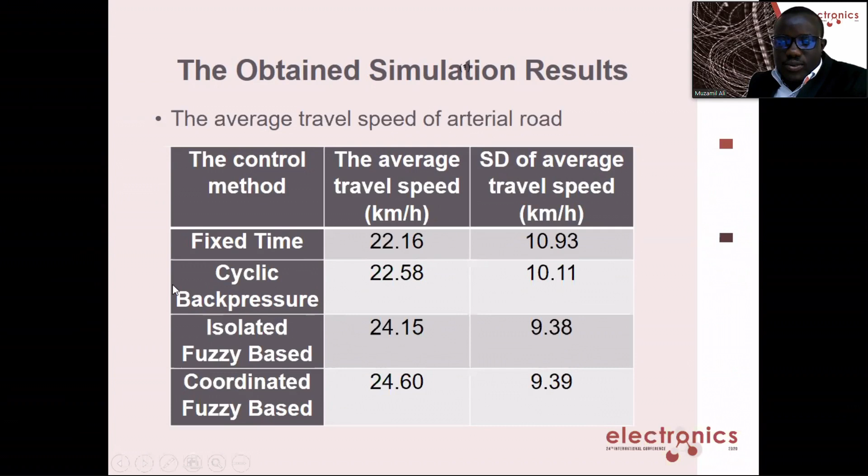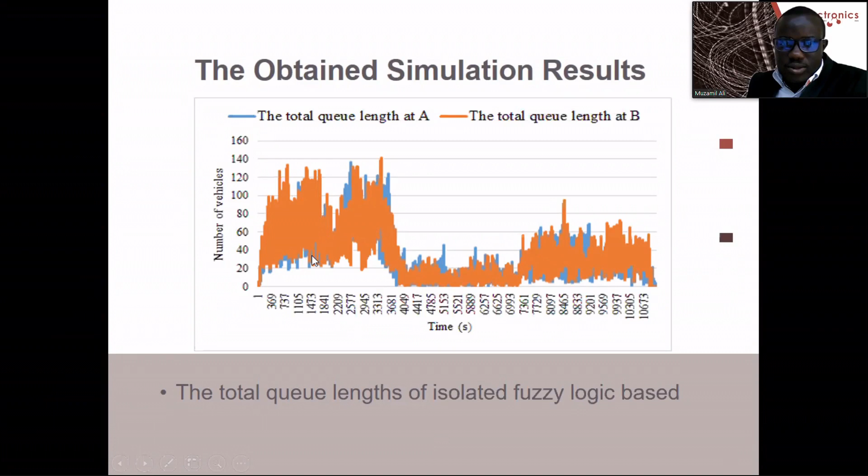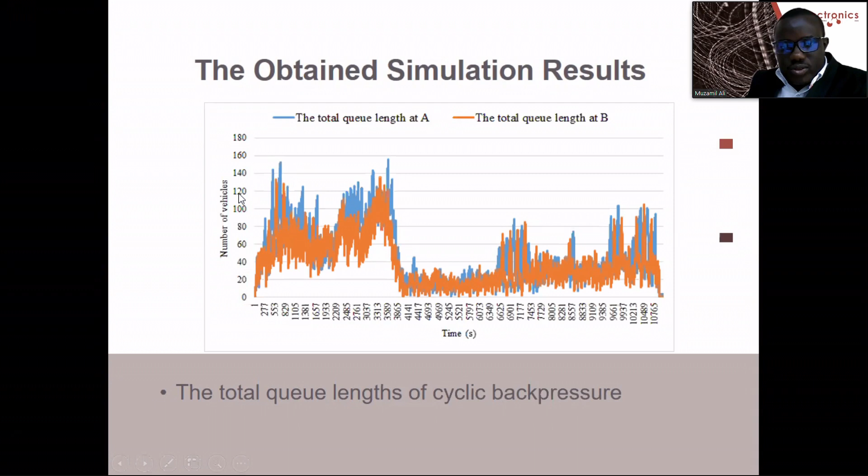As a conclusion, a decentralized adaptive signal control strategy based on fuzzy logic and modified Webster optimal cycle formula is proposed. To maintain coordination between successive intersections, information such as traffic demand, coordination phase, remaining time, and queue length are exchanged between local and neighbor intersections.

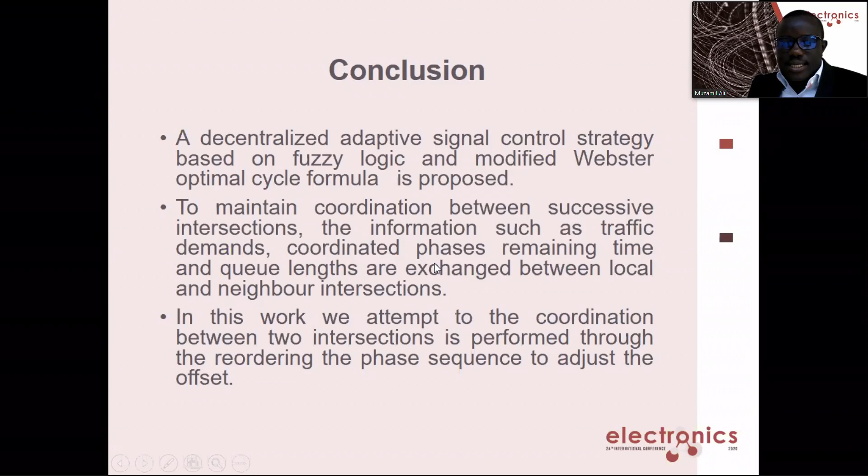In this work, we attempt to coordinate between two intersections through the reordering of the phase sequence to adjust the offset. The performance enhancement, for example in average waiting time, is about 34% and 16% compared to the fixed time and back pressure, respectively, for our proposal.

To accomplish a good result, we recommend that a mathematical model to calculate the speed of the vehicle based on the existing density of the road must be used instead of the fixed travel time that we used here.